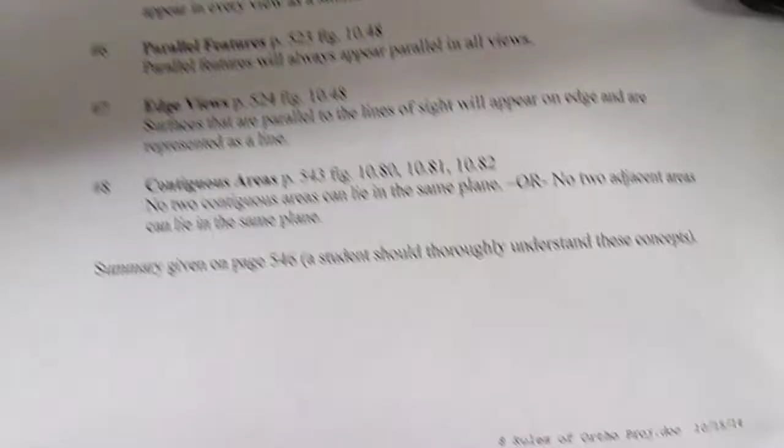Okay, so as we go through these, not all of them are things you will do every time. And in fact, some of them are things you do in the process of building a multi-view. Some of them you do to read a multi-view. Some of them you do after the fact to check your stuff. And the two I really need you to really know are these two right here. Those two will build 90% of all multi-view drawings. Now, these two can't work unless you have a base set of information. So either somebody has sketched out a shape and said, I want this to be this size, this to be this size, or you've got an existing part you're trying to replicate, something of that. You need some base information to get started. Now, once you get started, then these will take over and go for you.

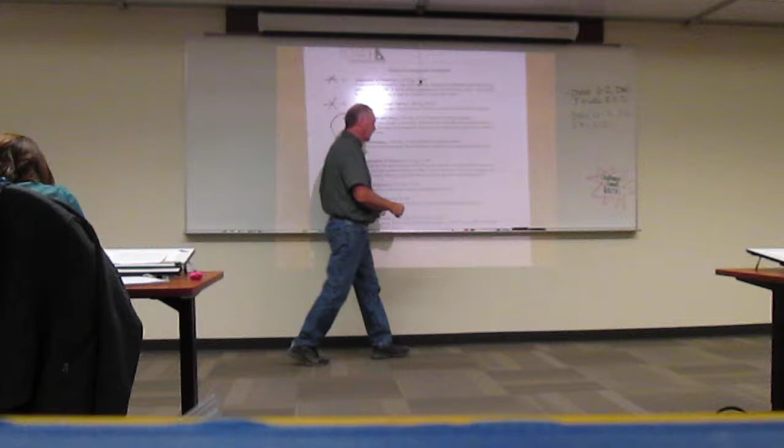These from 3 through 8 are kind of more analysis type of rules. So when you use 1 and 2 to build your object, then you use 3 through 8 to look at it at the end and say, yes, I did this right, or I didn't do this right. So in essence, that's the way these will work for you. But 1 and 2 you will use time and time and time again.

Notice that in the definitions of 1 and 2, what do they talk about? Adjacent views, related views. So before we jump into these, what is an adjacent view? Does anybody remember that from when we defined it? They share the same edge. Go ahead, Misty, just give it a try. They share the same edge. They're like right next to each other. Yeah, that's what you mean, right? Yeah, yes, they sit next to each other and share a common dimension. Thank you, that's an adjacent view. So this would be a top front, it would be a front right, a front left, a left rear, any views that sit next to each other. Keep in mind that glass box configuration never changes.

What is a related view? It's two views adjacent to the same view and share a common dimension. So in essence, this would be a top right, top left, maybe a right bottom. So on a top right, they're both adjacent to the front, and they both share the depth dimension. That's what makes them related. So if you know those two definitions, it will make a lot of sense for you.

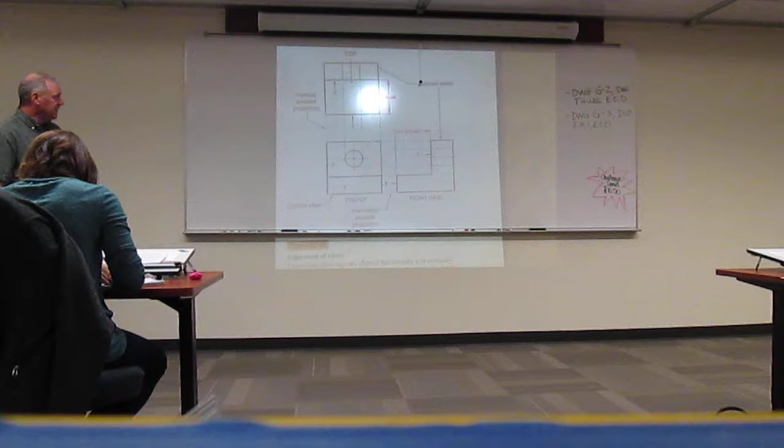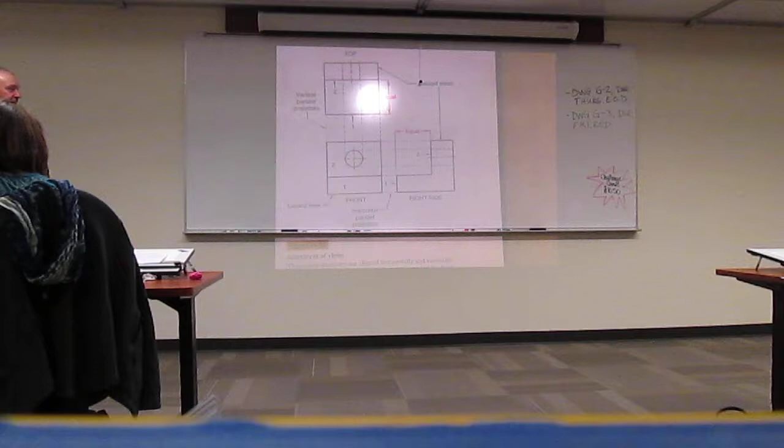So let's start with this, alignment of features. Page 504, figure 10.26. Let's go look at this. We're going to use the same figure for both of the first two rules. Now, I have two definitions on each of these, just because our text has the first definition that's pretty much in there, but I had an old second text that I really like the definitions of, so I added that also. So you have two different definitions. They mean the same thing, just whatever you feel like you can remember.

So, rule 1, alignment of features. Every point or feature in one view must be aligned on a parallel projector in any adjacent view. Or, a point always appears as a point in every view. What do points make up? So the base geometric unit is a point. If I have 2 points, I then have a line, which is an edge. That's the intersection of 2 planes. So once we have a line, then we go to faces or surfaces.

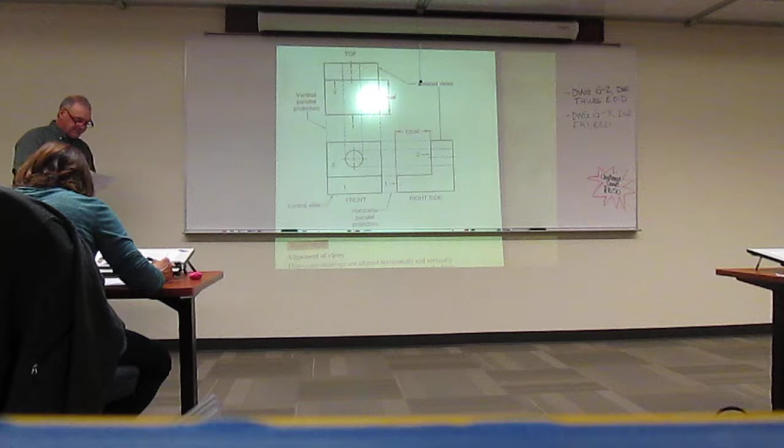So that's what I mean by a point always appears as a point in every view. If it can be located in 2 views, it may be located in every other view. So, every point. They kind of give you this idea.

Now when we say parallel projectors, that's these blue hidden lines here. So if I've got this drawn, I can draw the front view. Now for me to find this top edge in my right side view, this has 4 points to it. Now you really see 2, 1 and 2, which are these 2. But that also has 2 points behind it. Now you'll see this as we go through.

Now if I want to find this in the right side view, all I do is take that edge, or wherever I have a point, and I draw horizontally or perpendicular to the plane of projection, which is our fold line. Remember, there's a fold line that could be represented in here. And I'll use a phantom line to represent a fold line. Because as I unfold the box, this hinges out to the right side view. So my plane of projection is perpendicular here to go in.

That top surface must fall on that line. It has to. Now additionally, if I'm going to do this top surface in the top view, all I do is I go, I know I got a point here, I know I got a point here, and you throw them up. They have to fall on those lines. Now you don't know where it falls on that line, but you know it's on that line. That's really law 1. You draw something, you got any point, quadrant point, center point, edge, points, whatever. You can always project that into an adjacent view with a parallel projector. Has to fall on that line.

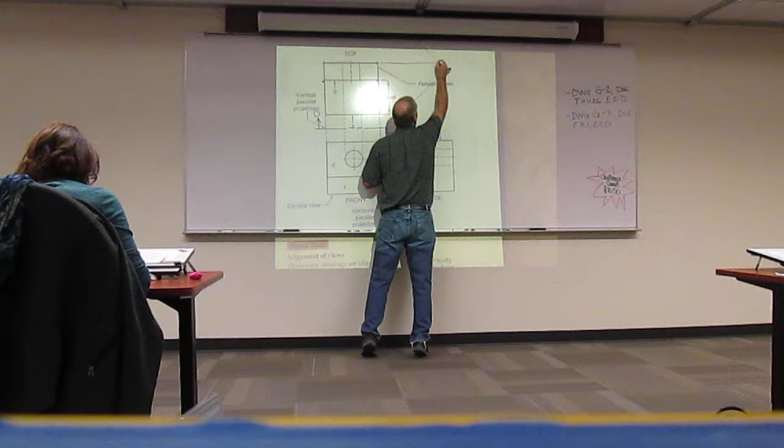Now, how are we then going to transmit that over, because we know this is depth, we've got to transmit that over here. We can do it 2 ways. One, I can use a miter line, where I would then take this, shoot it over and down, shoot it over and down. That works. Or I can pull my dividers out, or a scale, and I can come in here and measure and say, well, it's right there, I know that distance. Come over here, get this line established, and measure that back, and I can find that line.

The thing that you want to do is draw your front view, draw as much of any other view that I can, and you may not be able to complete the front, you may not be able to complete the right. And then you start using rules 1 and 2 to project back and forth until you get those complete. Once you have 2 views complete, you have all 3 dimensions of the object identified. You can then use that to create any and all views because you've got height, width, depth of the entire object.

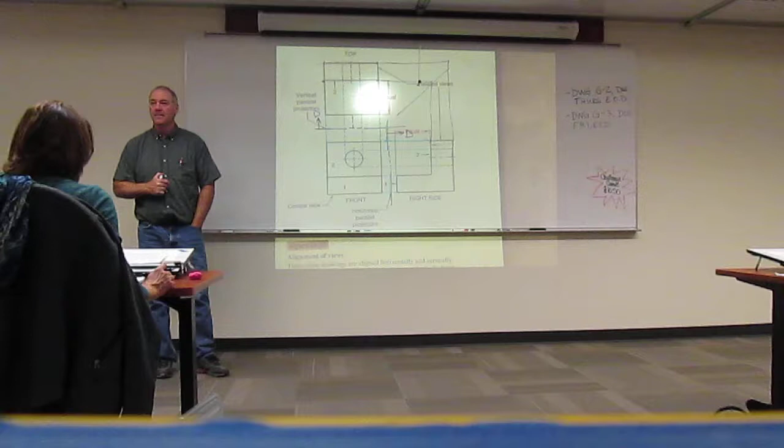I don't know if that maybe confused the object or helped it, but the point being, rule 1, once you have established something, I can find any other point in any other view with a parallel projector. Where does it fall in that view? I use rule 2. I come from a related view, find the depth or the width or whatever the dimension is, and transmit it to that view. Because they have to be equal.

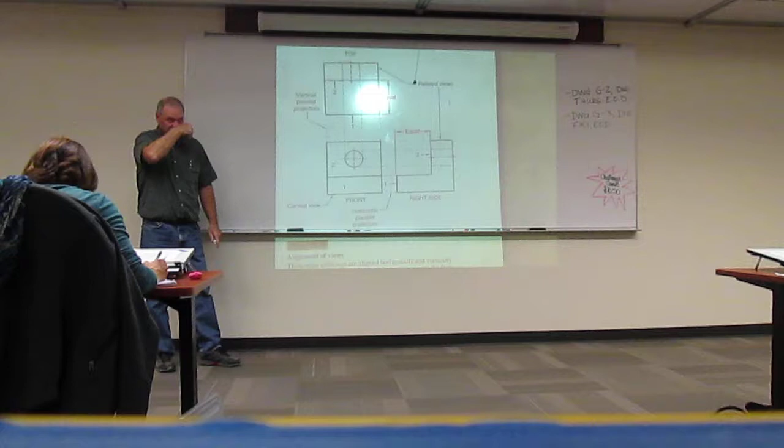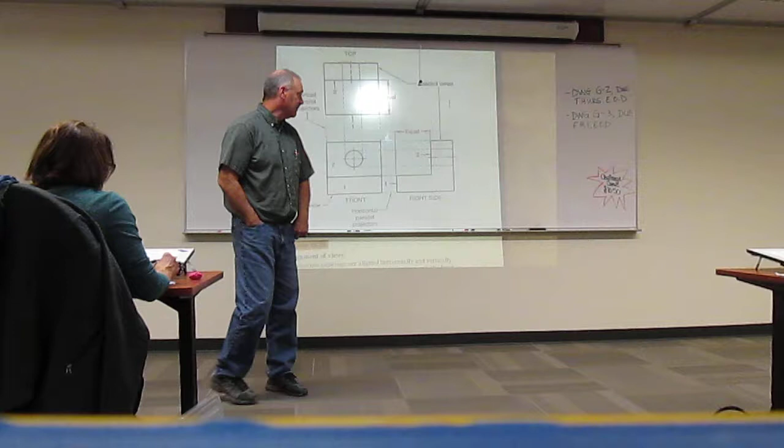Yes, Sharon? When we did our drawing assignment yesterday, you had us do the math where you did the dimensions, added, subtracted them from the overall length of the paper, and then divide by 3 to get the space width. How does that work, because when I did that, I had 2 for 1, and then the other one was 1.25, and if the fold lines are supposed to be equal, how does that impact that? Good question. What's important with a fold line on the distance?

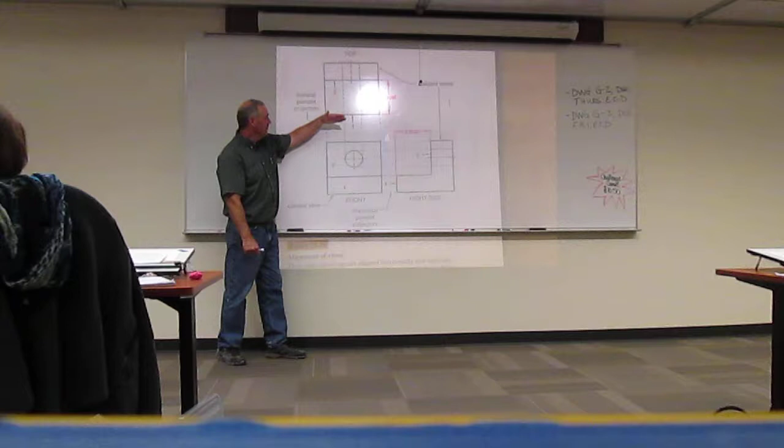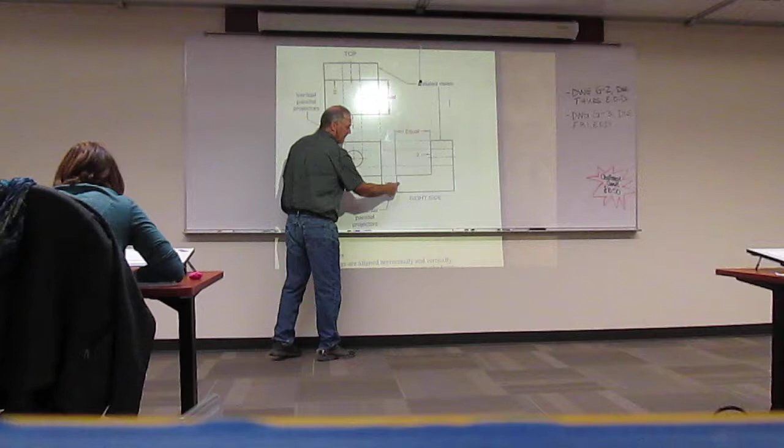Okay, so let's say we've drawn our front view. We're getting ready to produce our top and our right side, but we've drawn this one. Now I come in here and I say, you know what, because this is a great example, notice that this is greater than that, right? These two aren't equally spaced either way.

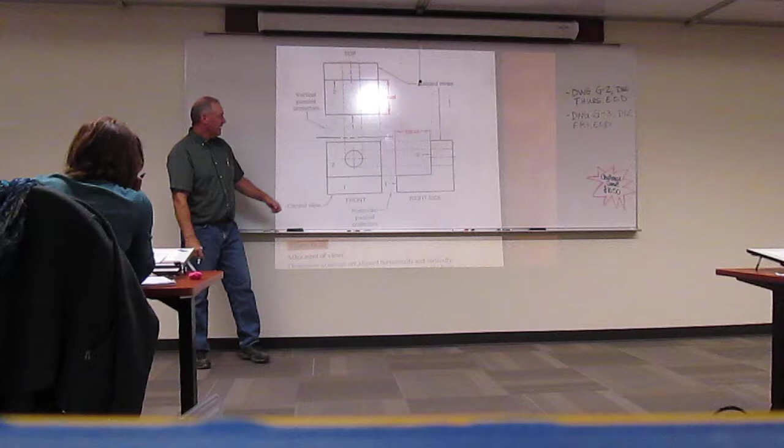Yours wasn't either. Okay. So what I do is I come in here off of this object and I throw a fold line in, and I just pick an arbitrary spot. All it has to do is this thing has to be parallel to my horizontal. Has to be for the glass box.

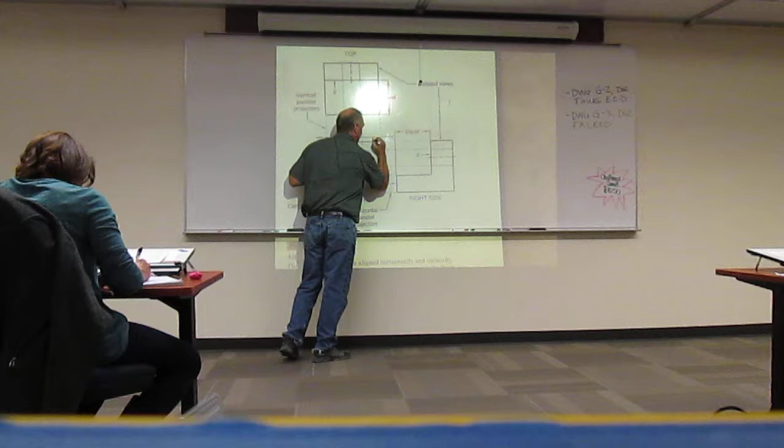Okay. Now, is this distance right here important? No. It absolutely is not important. It will never be used. Because the distance from this object to here just says, oh, it sits towards the top of the box, but there's nothing here. Now, the distance from here to here, though, is important, because this is depth.

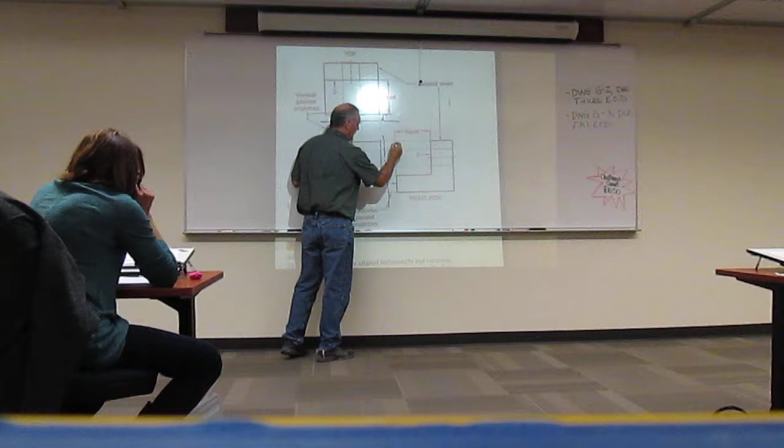So what I then have to do is when I do this one, let me draw this in a different spot so it looks more copacetic with our picture. I'm going to draw it there. Now then I would have to come over and I would pick again an arbitrary spot for this. Now, if I come in and say, well, I'm going to make my front right here, this distance right here has to be equal to that distance.

So in essence, what I'm saying is you can put the fold line wherever you want, but once you set that fold line, your related views will be the same distance from the fold line. And maybe, let me kind of do this a little different. Okay. Let's say I have some object here. Let me sketch you one.

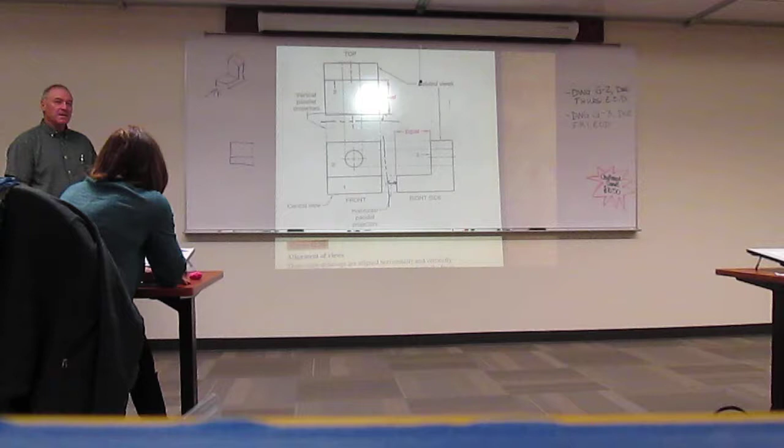Okay, so we're going to do that. This is going to be my front view. So I'm going to come in and draw my front view, and it's going to look basically like that, correct? Now, I'm going to go ahead and build my top and right side view.

The first thing I'm going to do, if I use fold lines - you don't have to, there are other ways to do this - is come in here and pick a spot. So there's my fold line, and over here I can pick any fold line spot I want. I intentionally made the distance from here and here not equal, because it doesn't matter. I'm just picking a spot.

Now what I'm going to do is project these up, because I know there's points here that fall here and here. They have to fall on there. Where are they going to fall? I'm going to make this front edge, as I look at it from the top, which is this way. Let me use the same color, go back to purple.

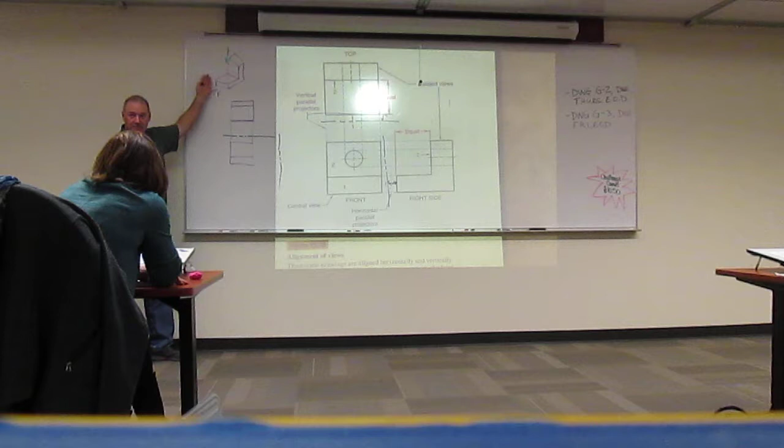I'm going to put it right here. That's this front edge. Then I'm going to go and measure for the back edge - it sits right there. So now I've got that surface, and I can measure that, and that is my top view right here. All I did was come in and pick an arbitrary spot, then measure my depth, because I tried to draw as much of it as I could based on the information I had.

Now, when I go to build this view, what do I do? I use rules 1 and 2, and that's all I have to do. So the first thing I'm going to do - what am I using, green here? Green's my projection line. All I do is come over and shoot lines horizontal.

Now, the distance from the object to the fold line is irrelevant, but the distance from the fold line to the object is relevant. So the distance here, I'll call it A, has to be equal over here. So where's that going to fall? That's that edge. So I'm going to come over and put it about right here, where this distance is A. Put it right there.

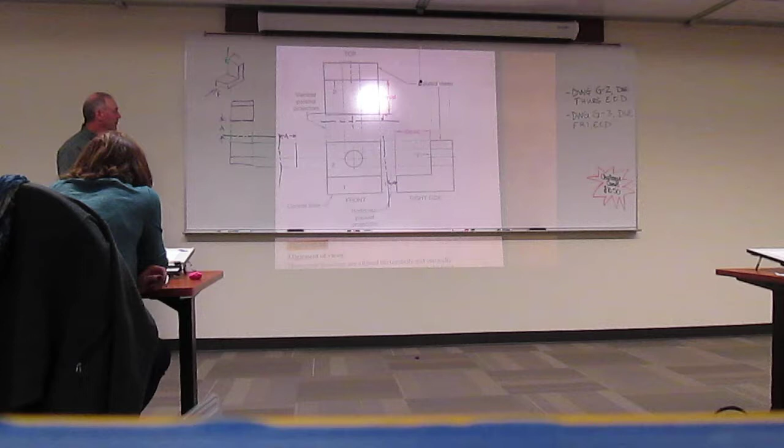Now I know that has to be that front edge. Again, I don't know where it really sits. If you do a little analysis, you're going to see it's these two lines right here, so that distance is equal.

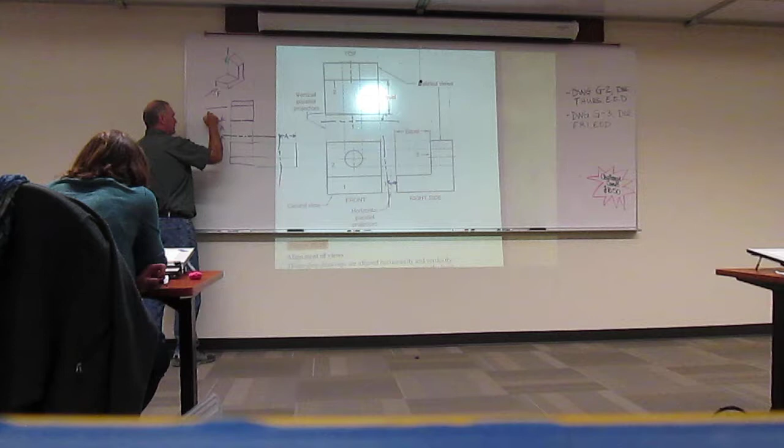Now I can say this is going to be distance B. So I can measure - oh wait, that's got to go to the fold line, because we're looking at the fold line analysis here. There's distance B. Then I would come to my fold line and measure that distance off and put that line where this distance right here is B, because they must be equal.

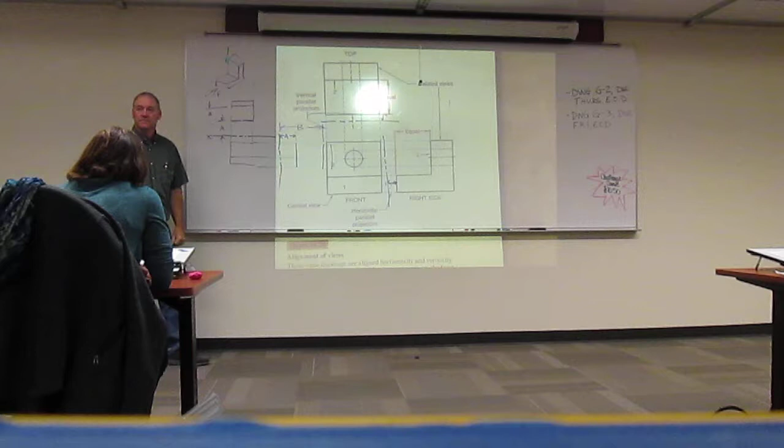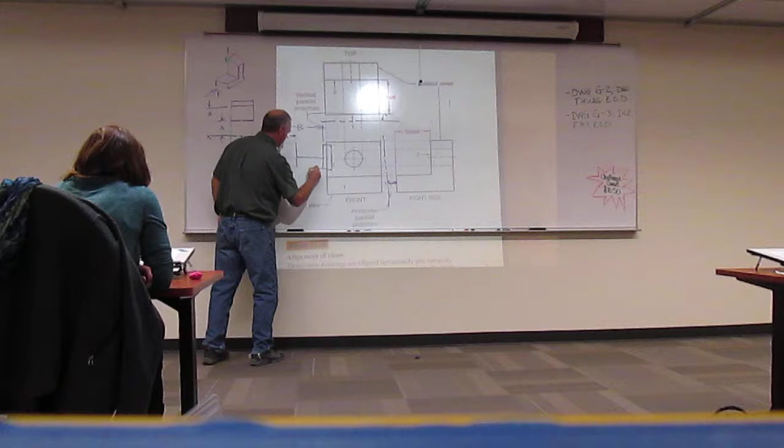Then I can do C, which would be the last one, and I'll set that one up. So now I'm getting an idea of where stuff is at, where this distance is equal to that one, this distance is equal to that one, that distance is equal to that one. Now all I have to do is analyze the shapes, and the thing's going to end up looking like that. And it's done.

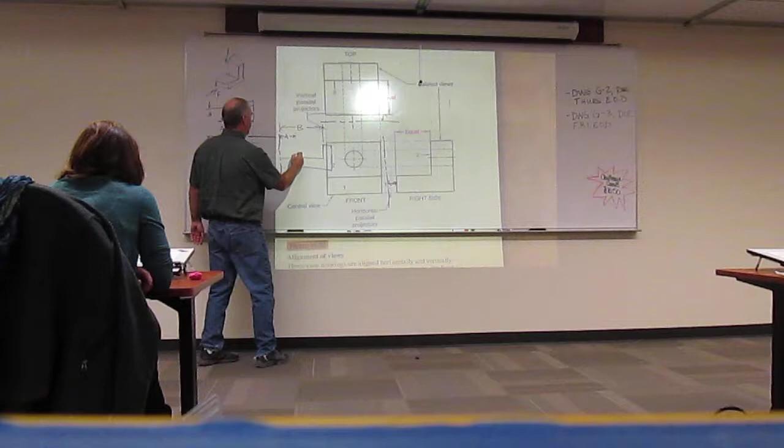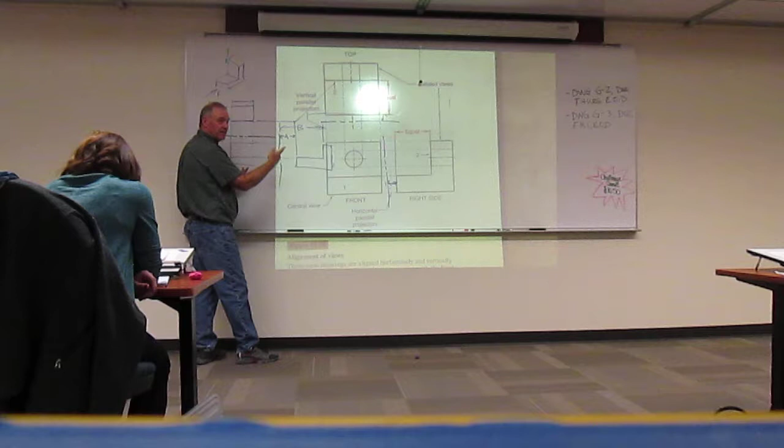Using rules 1 and 2. Now, I used fold lines out, but keep in mind, you can do a miter line and not do any of that measuring - it's all projection. Because I can get the exact same thing if I come up here, do this, and do that 45-degree line, then this guy comes and projects to here. What am I doing? I'm transferring that measurement. I come to this one, project it over, it's going to hit there. Bring this one, it's going to hit there.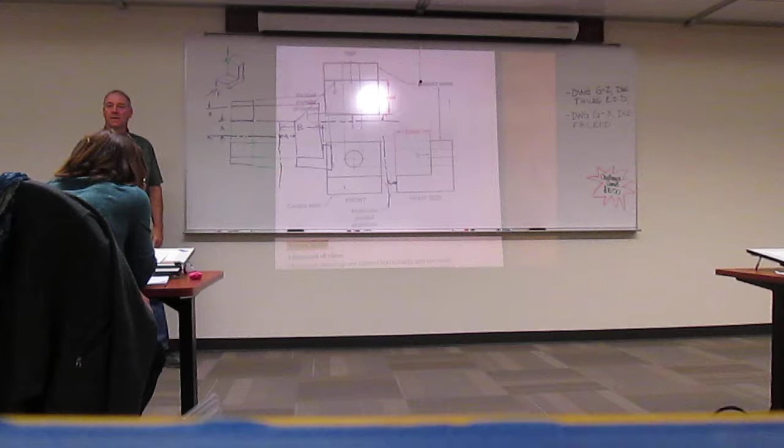Does your miter line begin where your two fold lines cross? It can, but you won't use any part of it except where the object is at. That's why when I always do a miter line, I take the closest edge, draw them up till they intersect, and then throw the 45. And then you can transfer - in essence, with the miter line, you're doing rule 2.

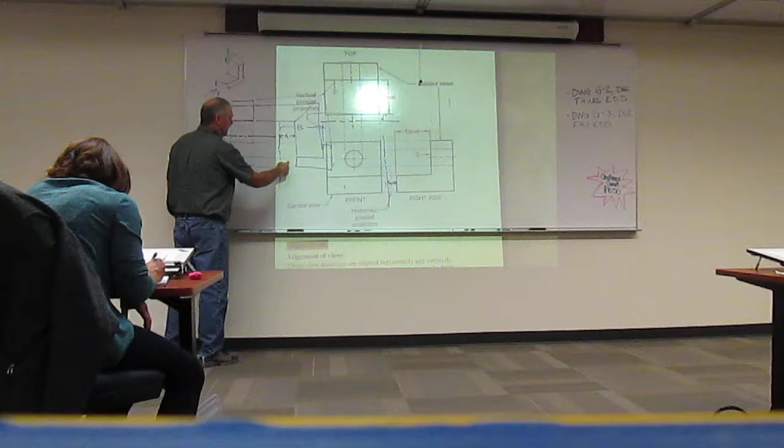If you use the miter method, is it important for you to have the space between the fold lines equal, or does it just sort of fall into place? The space from here, you mean? Uh-huh. Oh yeah, that has to be equal. It doesn't fall into place, it has to be equal. That's for you to build it.

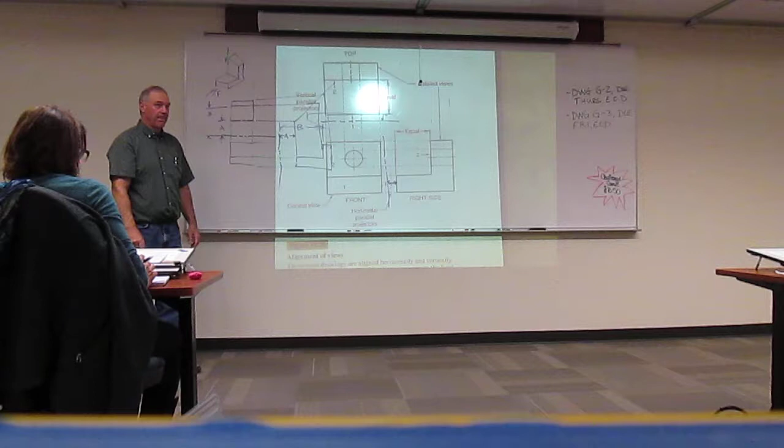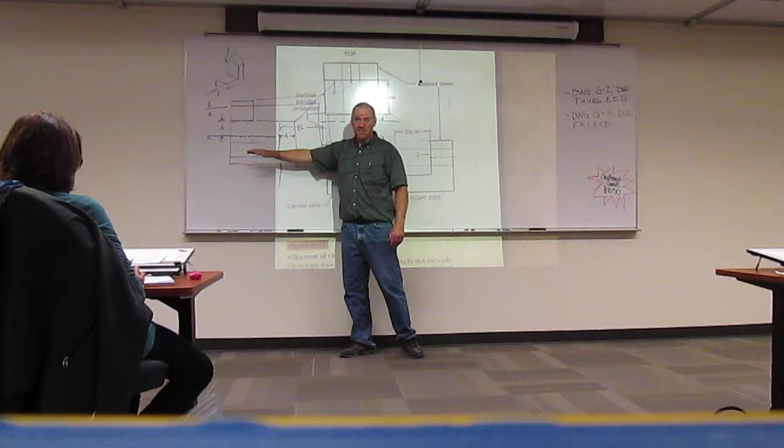Now keep in mind, once you draw it, you can move it into your drawing and set it wherever you want. It should be in that orientation, but a lot of times we'll draw it this way, and then slide the right side view out or in, the top view up or down. We never lose that orientation with the other views, because this guy can only move left and right, since it's always got to line up here. This one can only move up and down, since it's always got to line up. But I will slide them, because I now have to apply dimensions in between those things, which we haven't gotten to yet. So even though I build it one way, I might display it with some slight movement to accommodate dimensions that I put in between the objects.

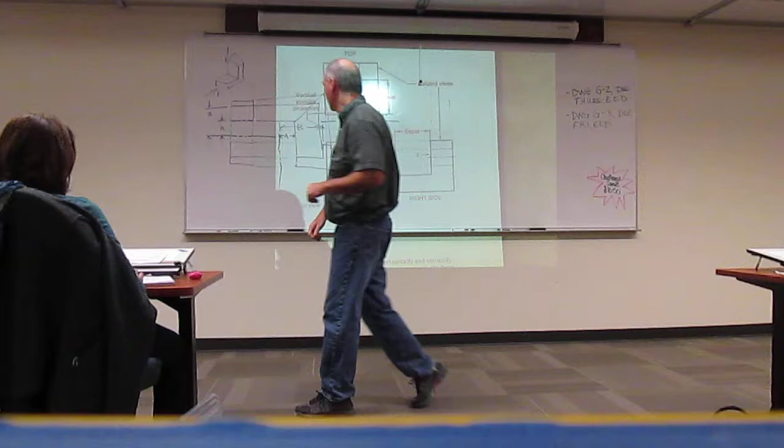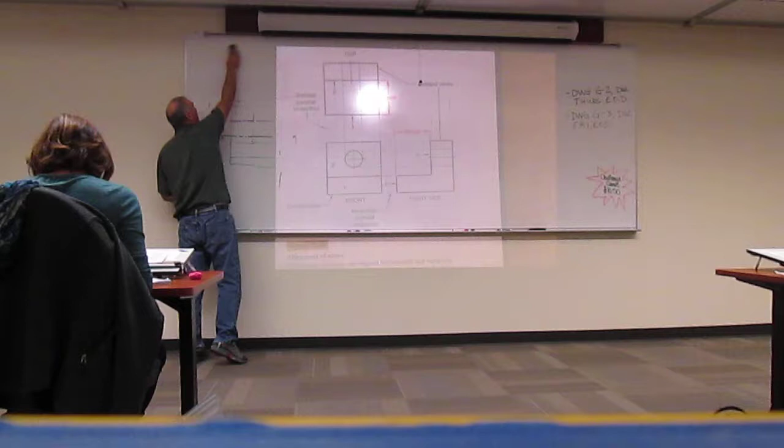So rule 1, a point in any view will project parallel to any other adjacent view. Rule 2, distances in related views must be equal. Like I said, you'll use that 95% of the time, it'll create almost everything you need. Those two.

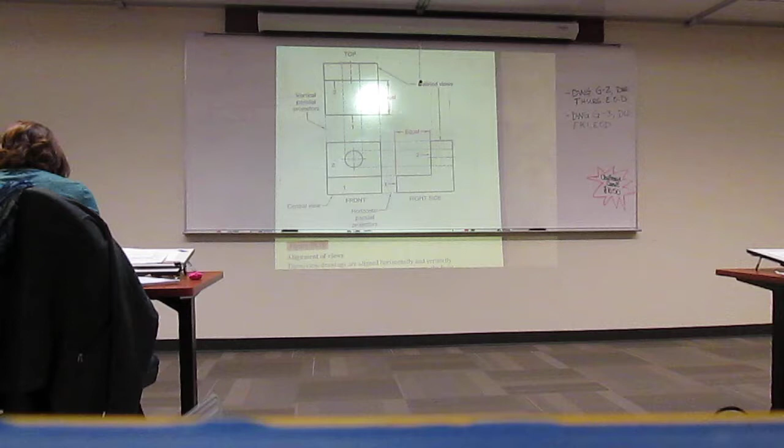Might make a little bit more sense once we get a little more practice with it. Any other questions before we leave those two?

Now, keep in mind on rule 2, let me just reiterate since we just spent a couple minutes with it. For your distances to be equal in related views, we transfer that dimension 2 ways: either through the use of fold lines, which are imaginary, or through the miter line method. Both of them allow you to apply rule 2.

By the way, I made the comment back in CAD. There's 4 or 5 ways to do everything, and I only need you to know one. You practice them, and then you come to a way that you draw that works effectively for you, and that's good. In this instance, you need to know the fold line method and the miter line method. You need to know them both.

Now, the reason I say that is because the miter line method of applying rule 2 is the fastest and easiest way, especially with CAD. It's super fast, so you need to know that. But the miter line method will fall down on you later when we get more complicated geometric shapes, and you have to go to the fold line method to create them. So you need to know both methods.

For now, I would like you to kind of stick and focus with the miter line method. When we get to a topic called auxiliary views, I'll make a big point of this, we have to go to the fold line method. That's the only way to get them done, at least that I know of, I guess I should say.

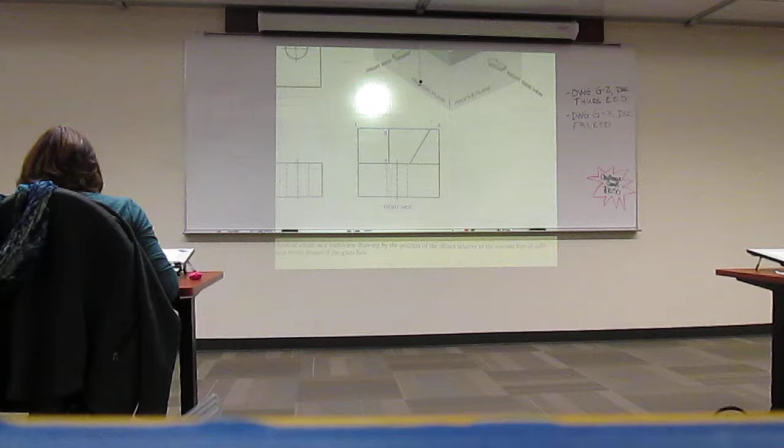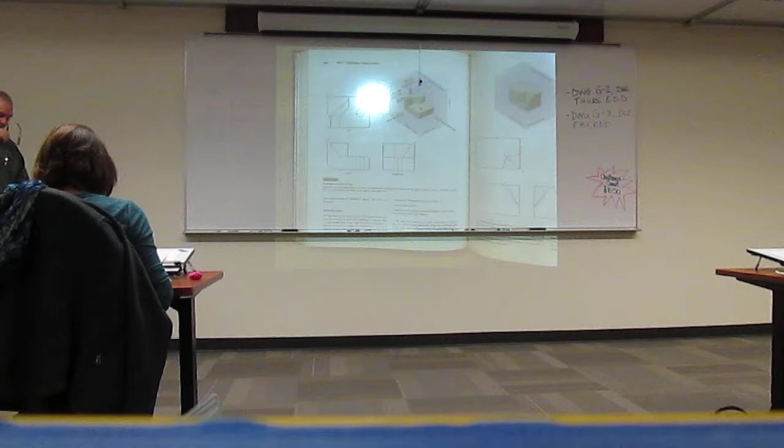This is for normal and inclined planes. So we're looking at this figure, 10.44. Let me just read this. Features are true length or true size when the lines of sight are perpendicular to the feature. An edge line appears as a point in a plane of projection to which it is perpendicular.

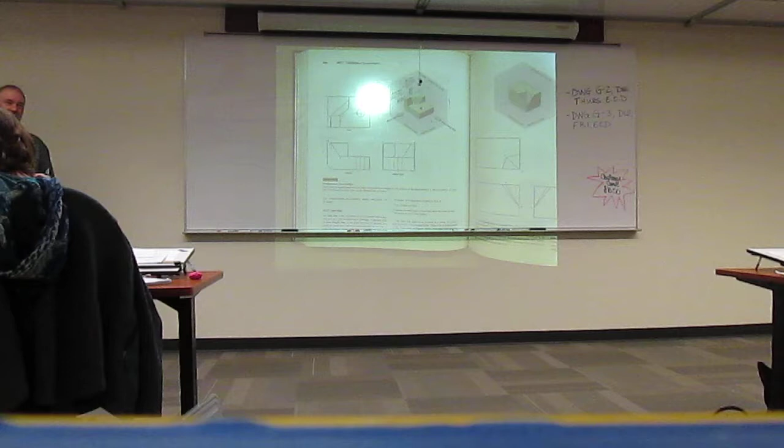So we're talking about normal and inclined planes here. Remember the definition of a normal plane? Definition of a normal plane is a plane that appears true size and shape in one view as an edge in all adjacents. So in essence, this one's allowing you to identify the plane so you know how they appear, okay.

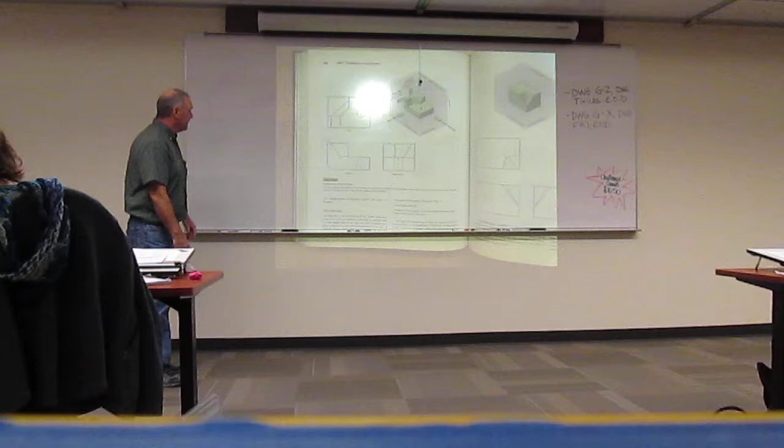So in essence, let's just look at, how about this front surface right here? Now, do we know if this is normal or inclined or oblique? You need more than one view to tell that. In fact, you generally need 3. This, in fact, is true size and shape.

How do I know that? Because my line of sight must be perpendicular to this, because if I come to the right side view, I see that shape as an edge. Remember, these rotations are always 90. So if I'm looking at it perpendicular, or looking right into it, you see a true size and shape.

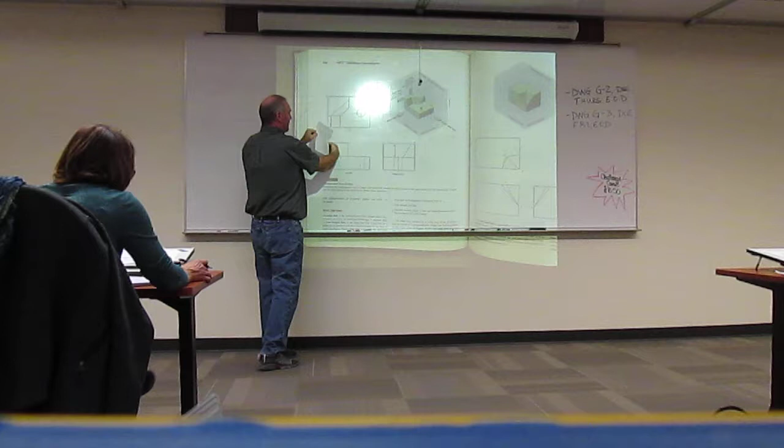If I turn this 90 degrees in any direction, or to any adjacent view, how does it have to appear? Go that way, go left? How does it have to appear? Edge, or a line. Always. Has to be. That's how we tell a normal plane.

So if this guy's normal, why? There's edge, there's edge. Is this top normal, or true size and shape? I don't know. Look at your other 2 views.

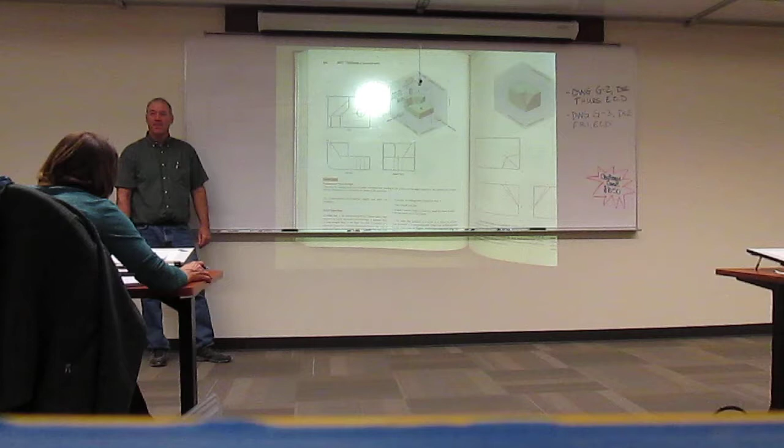I see a plane here. Where is it at down here? Right there, right? How do you see it? It's an edge. Where is it here? Technically, this one doesn't have to be there because it's a related view, not an adjacent view, but it's still an edge here.

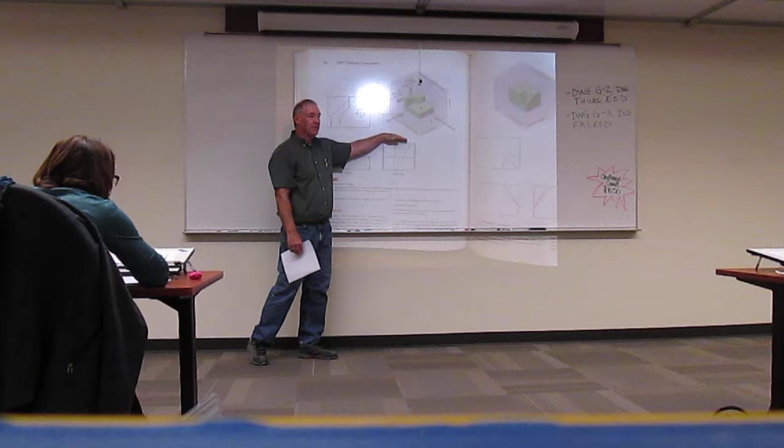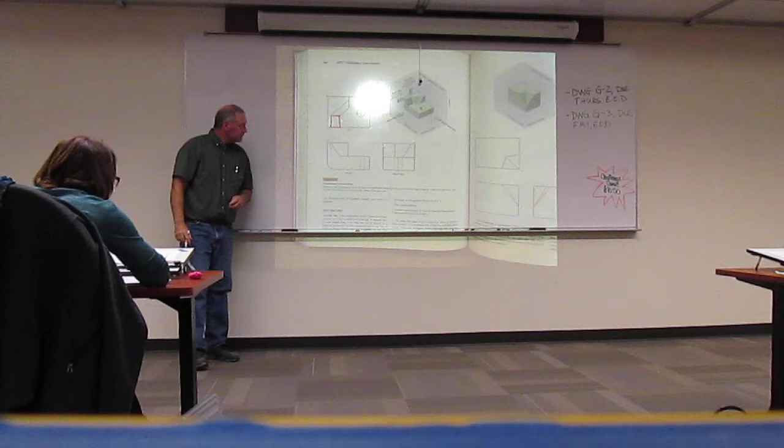Which lines on that are true size and shape? Okay, so let's just look at a shape. Let's look at this one right here, that plane right there. Now, that is an inclined plane. We just kind of throw that out there right now.